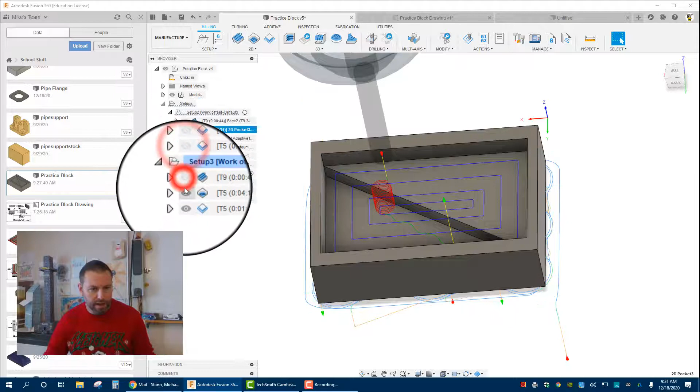All right, turn those off, and we'll open up a new tab, and I'm going to show you how to model the block, and then we'll come back to here to show you how to set up the actual operations. Now, all of the dimensions for this block are on the attached drawing file that I've created. I have one in front of me because I don't remember some of these. But essentially, it's the same size block that we used to create our letters that we manually wrote the G code for.

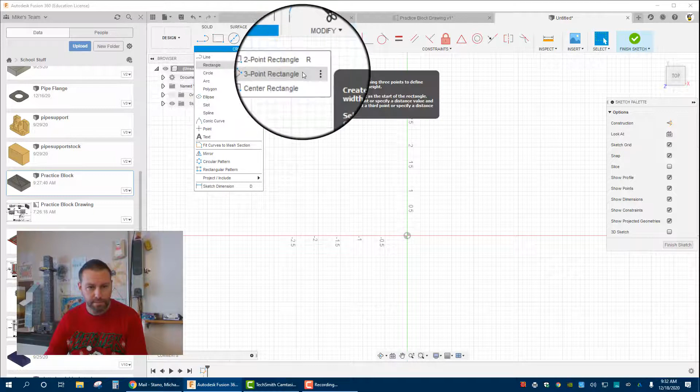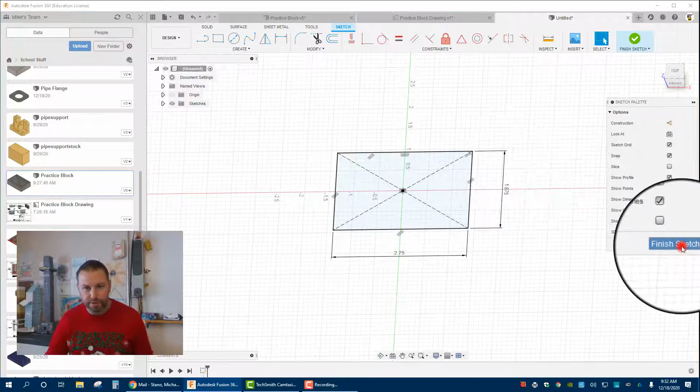All right, so I'm going to create a new sketch on this XY plane right here. I'm going to start with a 2-point center rectangle right here, and that is going to be 1.875 by 2.75. Now, these dimensions are slightly smaller than the 2x3 block that we're doing, because then it allowed the machine to cut and make this block the exact size it is. Then we are just going to extrude up 0.75 inches. That's our basic block right there.

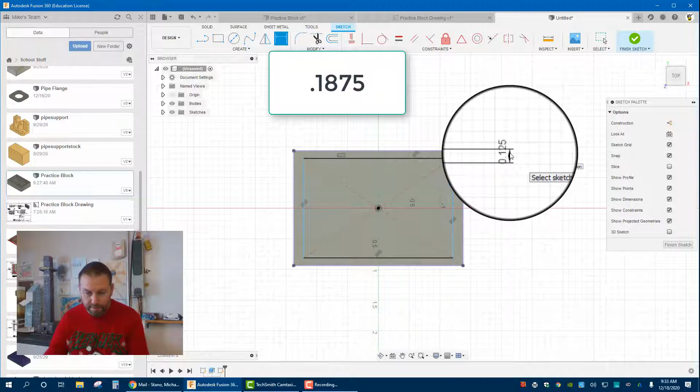Then I'm going to come in on the top here, create a sketch, and we can see that it's offset a little bit on the inside of 0.1875, 0.125. So I can come in with a rectangle here, draw it like that, then dimension. Hit project on that surface, so that's P, so now I can do these offsets. I know that's 0.125 there. Here is 0.1875, like that. And if you want to double check it all the way around, 0.125 is there. And that's good. 0.188 just rounded up from 0.1875.

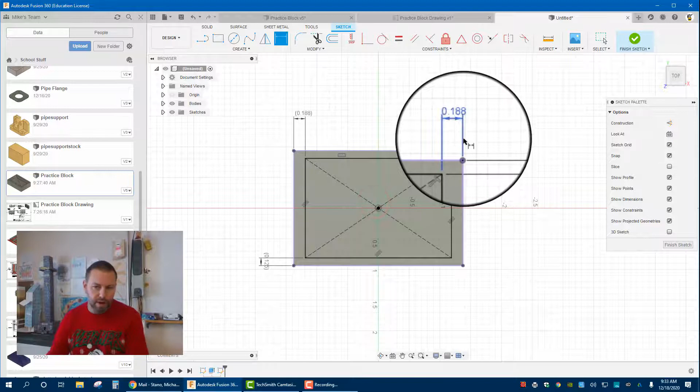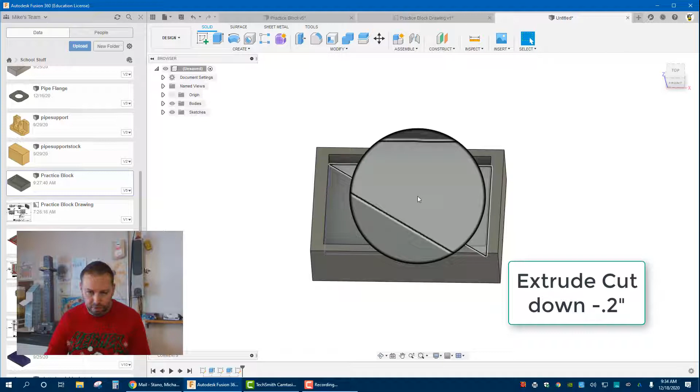We've finished the sketch, and we are going to extrude that surface down negative 0.25. So that's our first extrusion in. Then we're going to create a sketch on that surface. Actually, let's project that surface first. Hit OK. Line right from one corner to the next, like that. Finish sketch. So now we have two that we can extrude down, and it doesn't matter which one you do. I'm going to click on this surface and extrude down negative 0.2, make sure it's a cut. Good. So that side of the block is done.

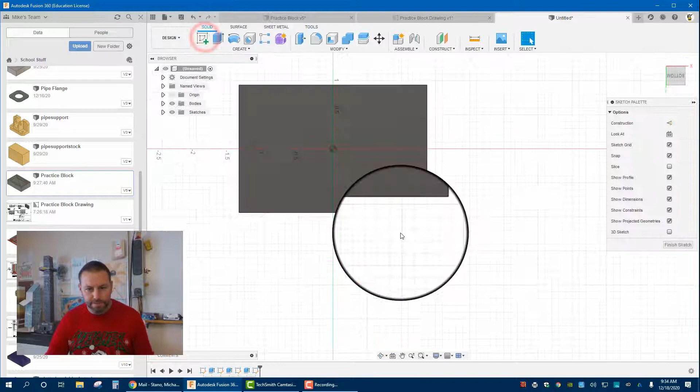Let's flip it over, and we'll extrude up those little nubbins, whatever you want to call them. Start sketch there. Those are 0.25. So I'm going to draw a circle of 0.25, and then dimension that. I have to hit project and project the geometry of that surface. And it is in from the surface 0.25 in both directions, like that. Now we finish sketch, and I will extrude up 0.1, I believe, looking at my drawing.

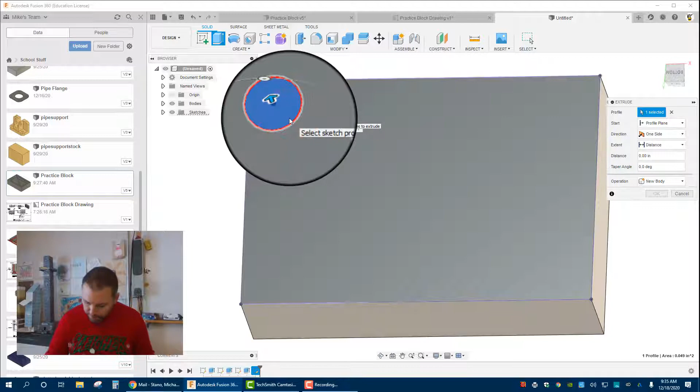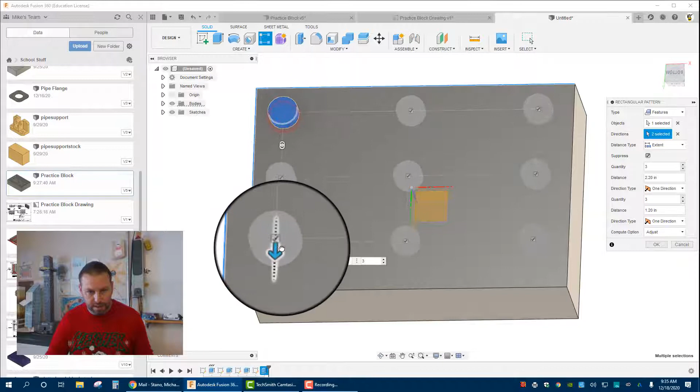And now I'm going to do a rectangular pattern of that. So I'm going to click features, directions. I want this direction and that direction, so two directions. And basically I can pull these like this and like that. Let's see if I can get the spacing correct. The spacing vertically should be 0.6875. That should be correct. And then the spacing going along this way should be 1.125. See how that looks. Oops.

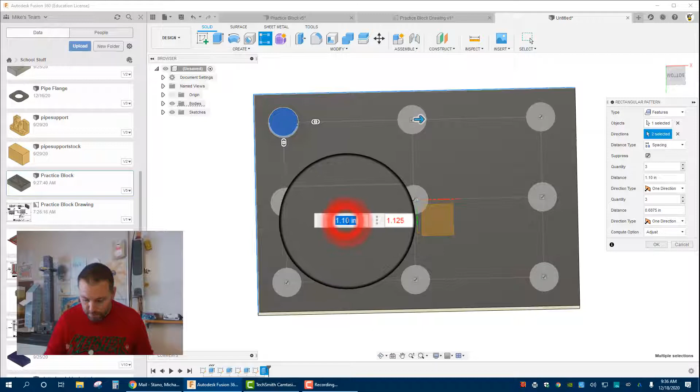Three like that. And let's hit OK. Let's see how that looks. Now we can actually, if we go into here, let's just double check. All right. And I'm going to hit project on a couple of these things. I'm just going to project them so I can get dimensions to make sure that the dimensions are correct.

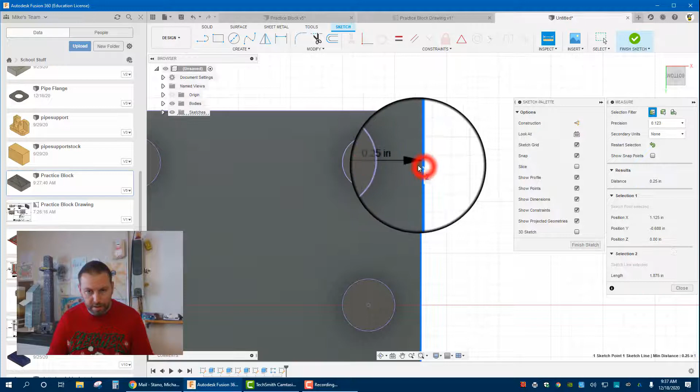So I can go up to inspect, click here. All right, so that is 0.25. And now from here, okay, inspect, from here to here is 0.25. So we're all good. Looks like that dimension is good. So then if we double check here, right, 0.25.

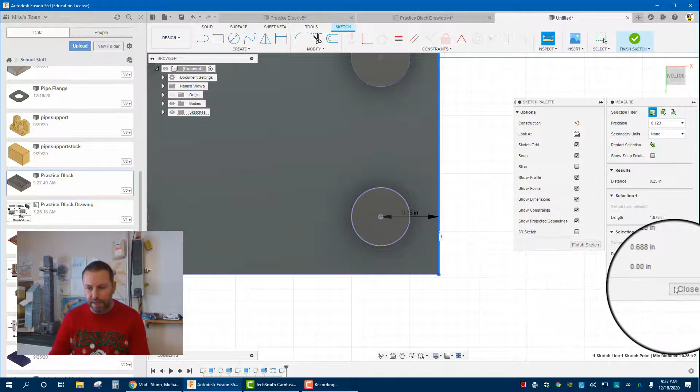Inspect again, and 0.25. Now if you follow the directions, you should be good to go. So it's a step that's not needed. It's just showing you how to use the inspect tool. And that now is the finished block. There we go. That's what we need.

All right, so now make sure you save this. Click save. And I'm just going to go flip over onto my practice block now. It's right here. So that is basically how you make the block. Okay. Now, if you have a little bit different method you want to make it, you're more than welcome to. But that is what you need.

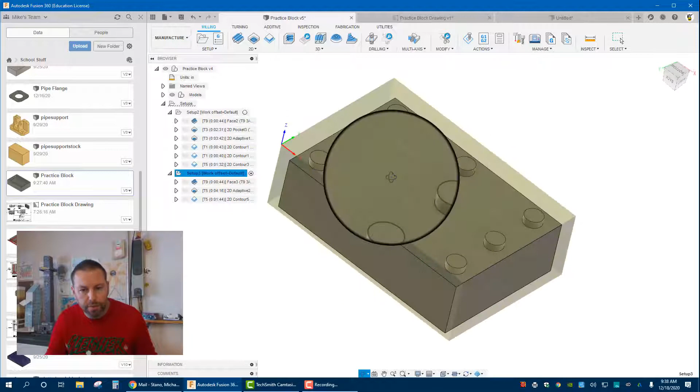Now we are going to go into the manufacture setup. So remember, last time we only did the 2D setup for the CNC plasma cutter. So now we're going to go manufacture. Okay. These are the tool paths. So I'm just going to go through the different tool paths quickly with you and then into the actual settings for them. So we're going to do a number of different tool paths.

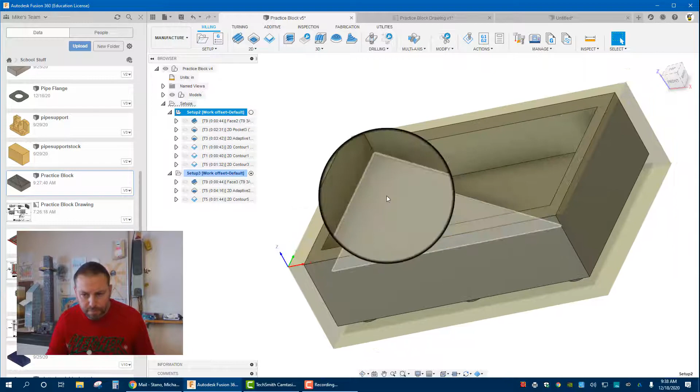The first one we're going to do, so we're going to machine this in two setups. Okay, so you see setup 2 and setup 3 there. So this setup, right, is the first one. And notice my work coordinate system is X, Y, Z, up like that. So we're doing this section first. Then we're going to come in, flip the block over to do these right here, and that's going to be my second setup. So two setups, multiple operations in each setup.

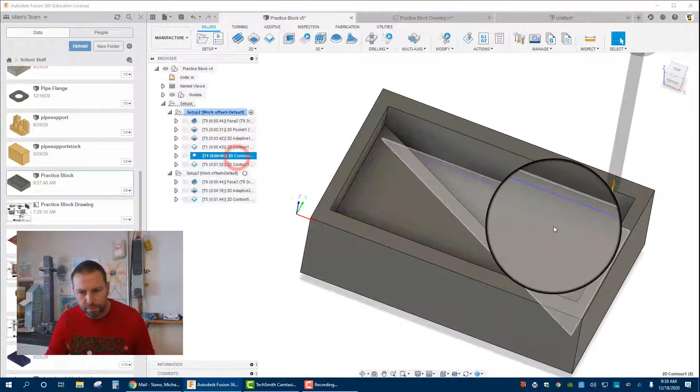So let's take a look at the first one here. So that's my first setup, like that. I'll show you how to do that in a moment. Then we are going to do a facing operation first to cut the material off the top, followed by just a 2D pocket. Then I will show you an adaptive pocket, a contour to clean up the edges and come in with a smaller tool, repeating that for the bottom. And then we are going to do a 2D contour around the top here to machine away and get us one of the final shapes.

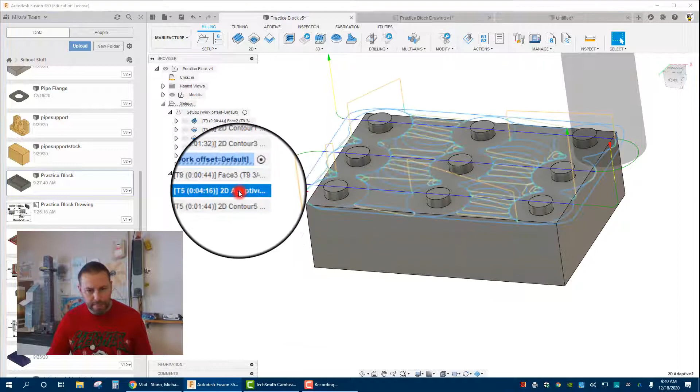We're then going to come around, flip the block over, face off material on the top again. So the facing gives us a very quick operation to clean and clear off a good amount of material. A 2D adaptive to clear away that, and then a 2D contour to come around and clean up around the edges of those little pegs, whatever you want to call them.

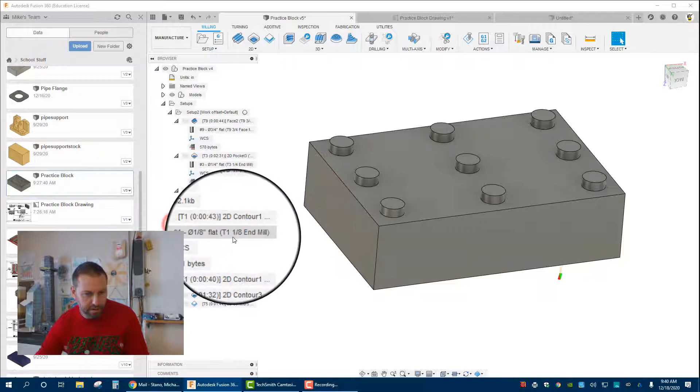Okay, so the first thing we are going to need to do is create a tool library with all the tools that we need to do this. So we have a number of different tools. The first one, so if I click the drop down here, we have a 3/4 inch flat end mill. That's what we're going to be using. A 1/4 inch flat end mill there, right, and an 1/8 inch. So I'm just going to write these down so I can show you how to do it.

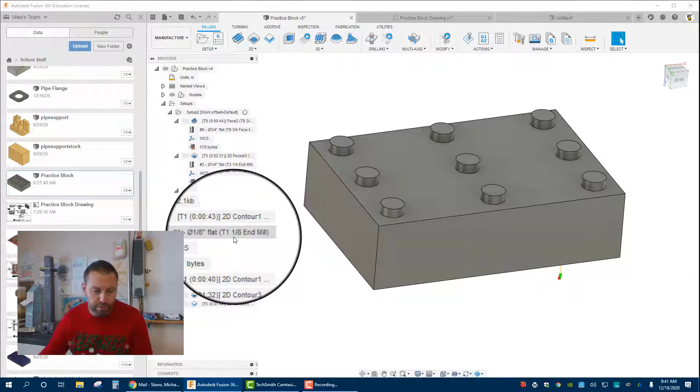So 3/4 inch face mill, 1/4 inch end mill, and a 1/8 inch end mill. Those are the ones we're going to be using there. And when we go to the other side, click there, same thing, right? 3/8 end mill, and also 3/8 there. So I'm going to add that to my list as well. 3/8 inch end mill. So those are 4 tools that we are going to need to create. So let's do that first. Let's create these.

All right, so these are just basically numbers off the top of my head. Nothing too crazy, but they're going to get us where we need to go. So we're going to go to Tool Library up on top. Go to Library over here, and you're going to hit the plus sign. The first one we're going to do is going to make the face mill. So we go over to face mill, right?

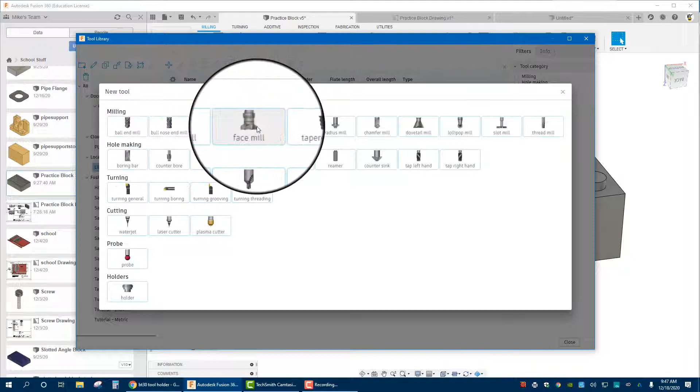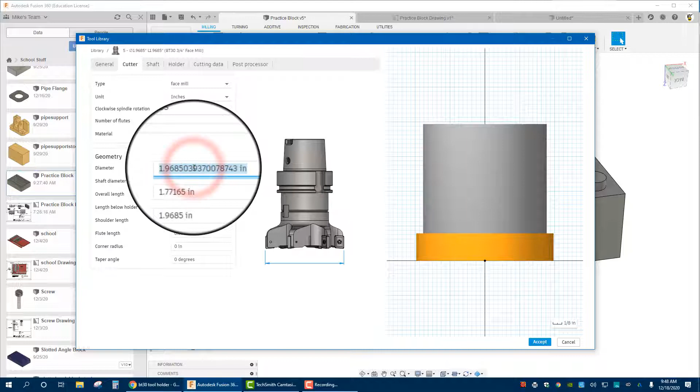And we can call it a BT30 3/4 inch face mill. Cutter, face mill, inches, good. Number of flutes, 3, high-speed steel. Now the diameter, like we said, is 0.75. So this is really small, but we're just using it for the simulation.

Shaft diameter, let's go 0.5. It's going to be slightly smaller. Overall length is 2 inches. And length below tool holder, let's do 1 inch. So you see how it's updating over there. We'll keep all of this stuff the same here.

Shaft, don't worry about holder. We're just going to use a regular BT30 up on top. So click on it, select holder, and there you have it. Cutting data, we're going to leave it at the 5,000 RPMs with all of their feed rates. Post processor, we don't have to worry about. Hit accept. So that's the first one.

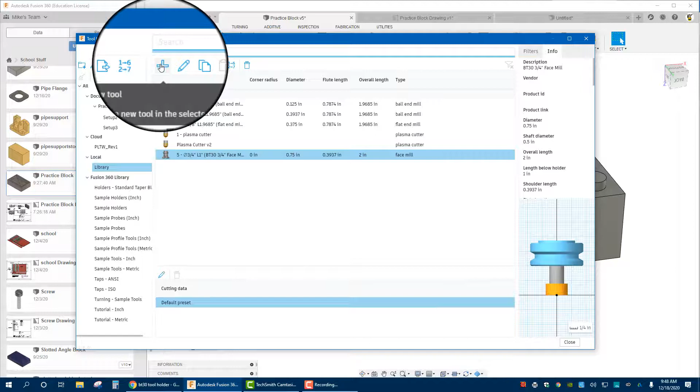We're going to go in again, new tool. Now we're going to use a flat end mill. This flat end mill is, let's do our 3/8 first, and we'll go decreasing size. 3/8 inch end mill. Cutter, flat end mill, inches, right? So the diameter is, let's do 3 divided by 8. All right, so 0.375. Overall length, let's keep it with the 2 inches again.

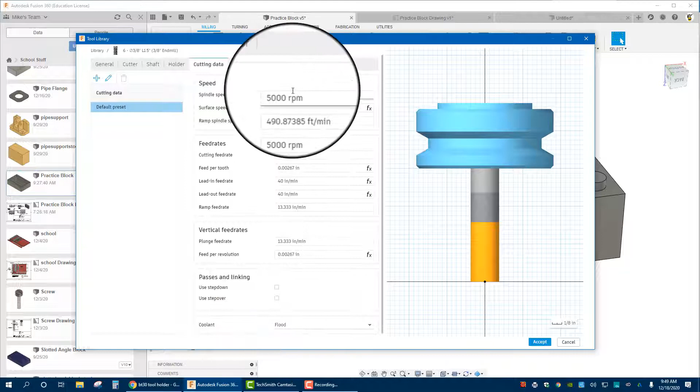Length below tool holder, we could do 1.5 inches, like that. Shoulder length, and we'll keep all of that the same. Shaft, click, holder, once again, a BT30. Select that. Cutting data, we're going to keep all of their parameters in. Post processor, good. Hit accept. Now we're basically going to repeat that a couple of times.

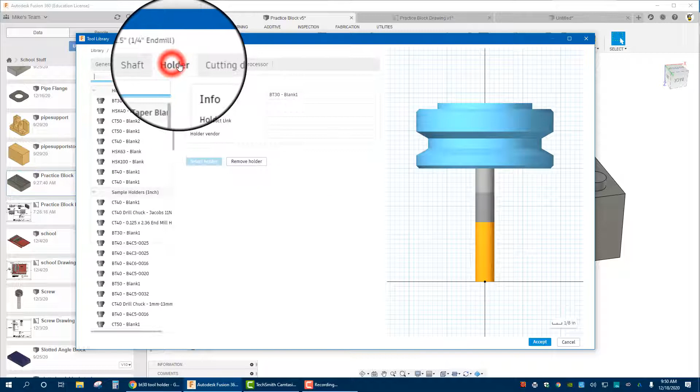So we can right-click on this, duplicate tool, go in, hit edit tool, and now we'll call this 1/4 inch. We're going to change the cutter to, we'll do number of flutes, we'll go 4 flutes. And diameter, that would be 0.25. And we'll keep everything else the same. Holder BT30 is all good. We'll accept all of their other parameters.

We can right-click, duplicate that tool. And now we can go into that new tool, edit it. That's, whoops, 1/8 inch end mill. Right, cutter, we'll keep 4 flutes, 0.125 for that. We'll keep everything else the same. Keep it all going through, accept.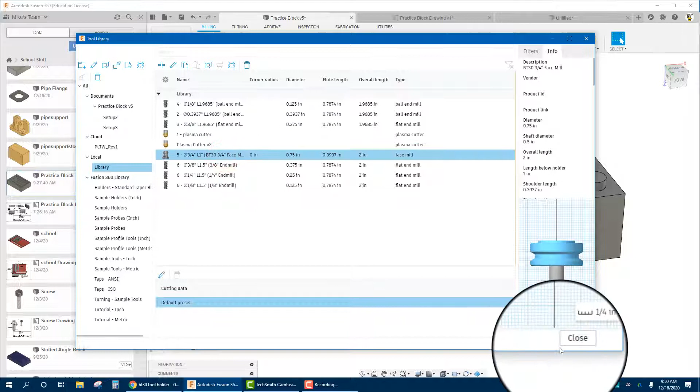And now we have our 3/4 inch face mill, 3/8 end mill, 1/4 inch, and 1/8 inch end mill. All right, so we can hit close, and if you want to click through and look at them, there we have it. Hit close, so everything should be good. All right, so at this point, we are set up and good to go to create all of our tool paths that we need for this. And the first thing we'll do is going to create this setup.

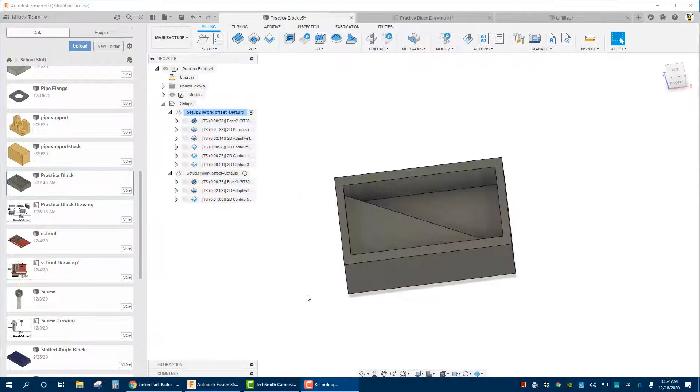Okay, so the first thing we're going to do is create our first setup to mill these pockets inside there. So you're going to click into setups here, click setup up on top, which will bring you to this menu. All right, so this brings up where we're going to put all of our points and our stock. So we're going to select the milling operation, and the work coordinate system, WCS, we want is box point. And you're going to click this lower left-hand corner right here so that the X is along this path, Y along that, and the Z is up.

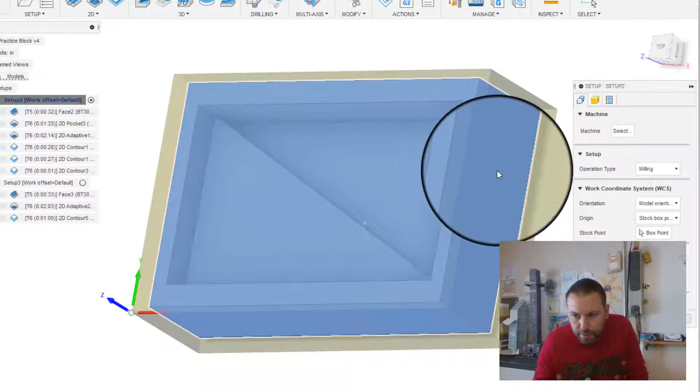Model, click and make sure that's highlighted blue. And then for the stock, it's 3, 2, and 1 for the X, Y, Z. So we can look all around. You can see that transparent color, set that up like that. It also tells us the dimensions of the block here. That is a fixed size block. Post-process, don't have to worry about it. Leave it as 1001 and hit OK.

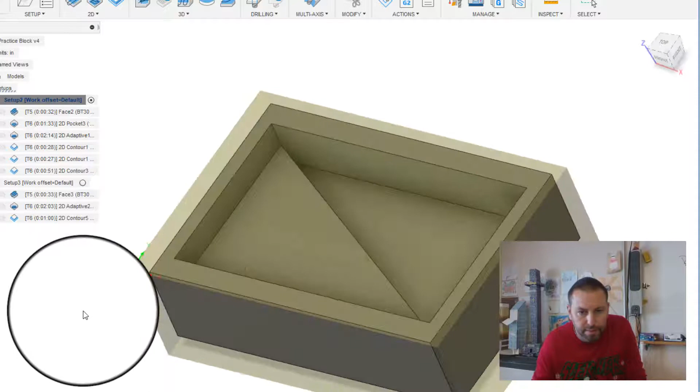So that sets up the first work coordinate system for the first series of operations. We'll do the next setup when we get to that point. Now what we're going to do first here is mill off the top of this. So let's take a look at the simulation here so we can see what it looks like first. So I'm going to click on it, go to simulate up on top.

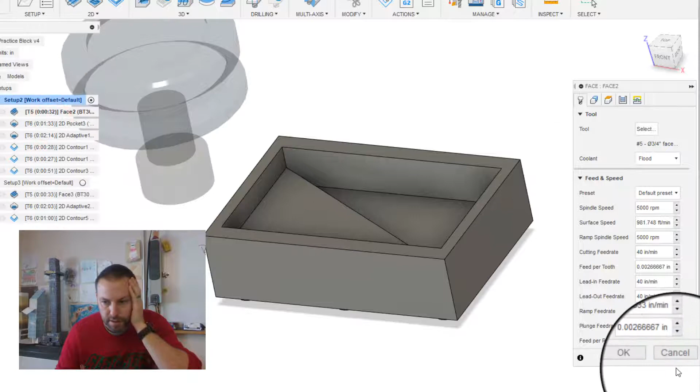You can see it sets up our tool, and we'll hit play. So it's going to take off just a small amount of material on the top of the actual block. In order to do that, let's close that. Okay. So in order to do that, you're going to click face up on top here. And notice in Fusion 360, when you hover over a certain thing, it tells you what the operation is. Click face, it's going to open it up to be like this.

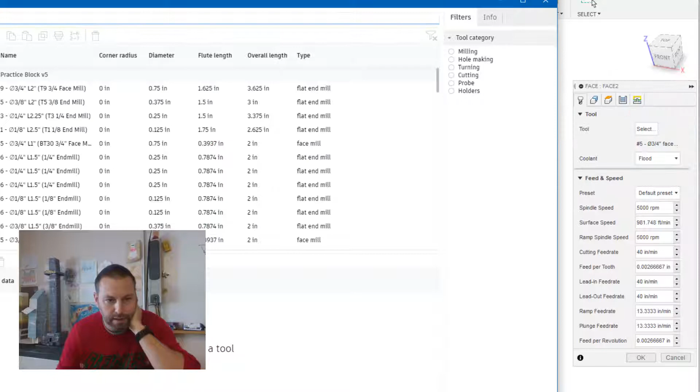So the first thing we want to do is select our tool. So you're going to go select, library, and you're going to look for the tools you made, and we want the face mill. Hit select. You can leave these presets. Remember, we can change them later. Right now, we just want to create the toolpaths. The geometry you're going to want to select is basically stock selection. You can leave it blank and have it just do this whole top. So this is the contour of the actual block.

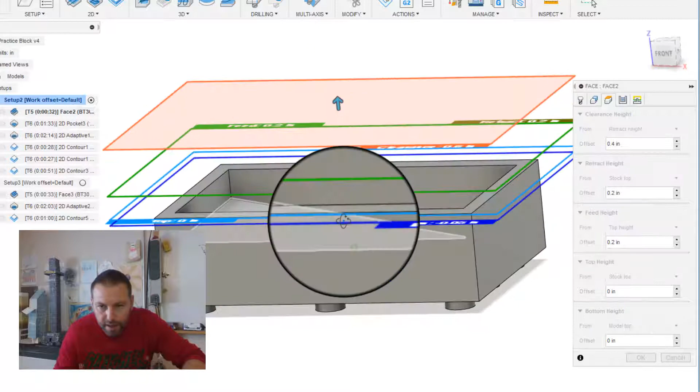These are the heights that we want to leave. So the bottom would be set to the model top. Right? Clearance height, basically how high the tool is going to retract up. Feed height, and then our bottom heights there. We're just going to keep this at a 0.004 tolerance. This is the step over, which is basically how much of the bit is going to be utilized in cutting. So that's 0.7125, and it's going to mill in both directions, which you can see here.

We're going to do a high feed rate mode. We're going to preserve that. Maximum stay down distance. All of these are going to stay the same, and we hit OK. And you should generate this path. Sometimes it takes a moment, so if you hover over it, it'll give you the percentage of how long it took to create that face mill path. And let's hit simulate again. And that's what you should have. It should look relatively close to this.

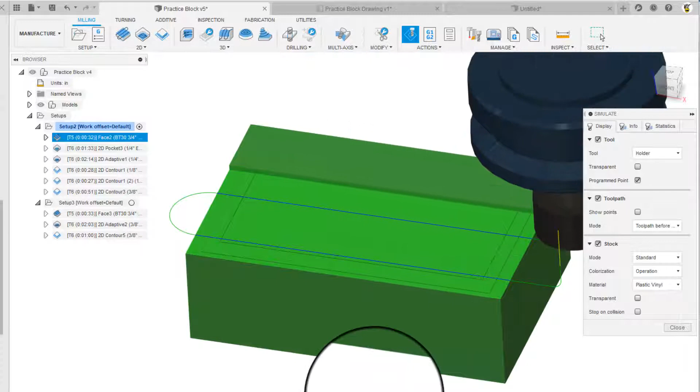And you can adjust the settings in here to keep stock or not, make it transparent, and change the amount. I keep the toolpaths in. You don't need to show points or anything like that. Info is over here, and statistics.

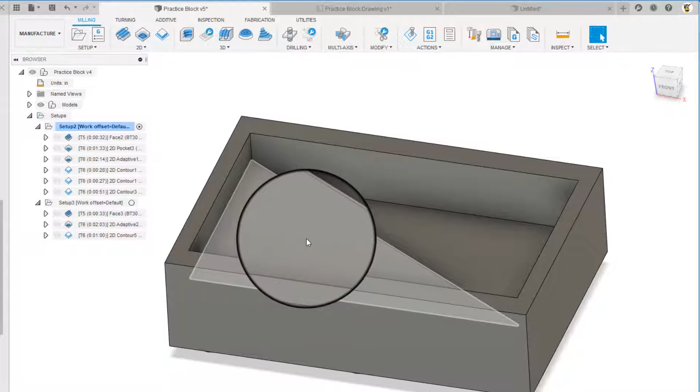The next operation we're going to do is create a 2D pocket that will remove this rectangular amount of material. So we're going to go up on the top and hit 2D pocket. So click that. I'm going to bring it into mine. And what we're creating is a toolpath that looks like this. It's going to mill down. Show the simulation of that. Okay, let's do this. Simulate those two. Okay, I'm skipping ahead. And now here's the next one.

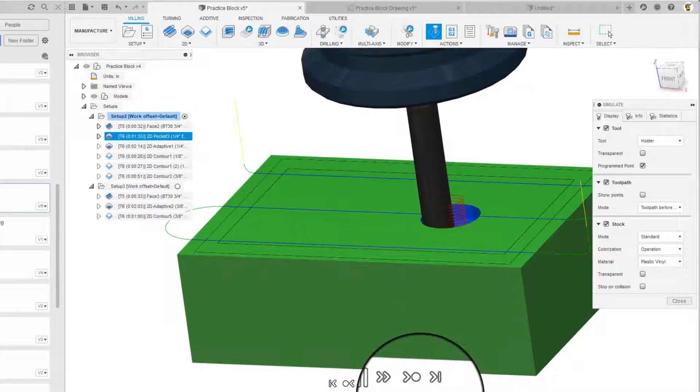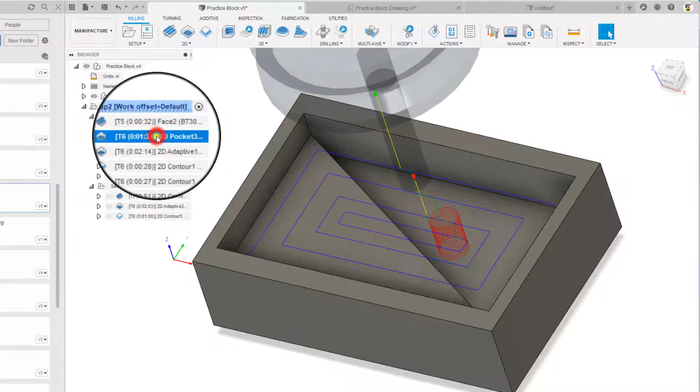So it does a helix down into the material, and then cuts out along this path here. We are going to leave a small amount of material around the outside edge to come in to do finishing passes, as we can see here. Okay, so 2D pocket. Let's click off. Edit there. For this, we are going to use a 1/4 inch flat end mill. Let's go to select, library, 1/4 inch flat end mill.

Leave the stock defaults. For the geometry, you're going to want to select the pocket that you want done. So you're going to click this and click this inside edge right there. Leave all of that unchecked. We'll leave all of this the same except for the bottom here. Go to selection, click on bottom reference, and then you're going to want to click this triangle surface right here. This we are going to leave the same. Finishing passes, unchecked. Max step over, keep that the same.

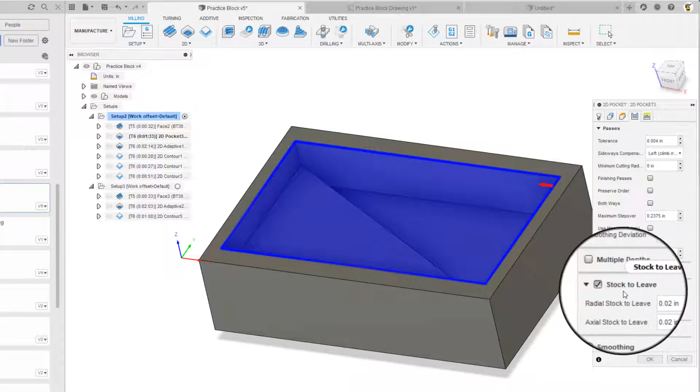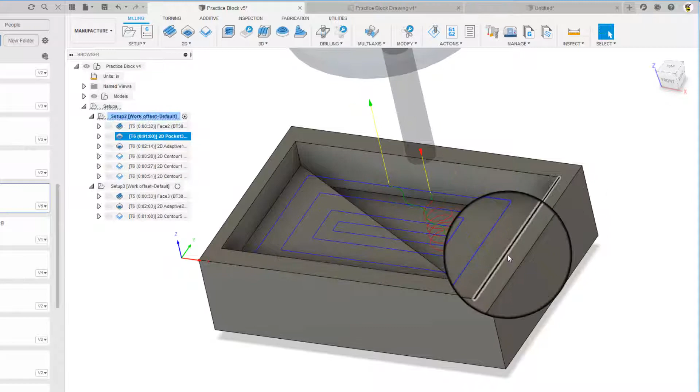With that, we are going to leave a small amount of stock to go around the outside, 0.02, so we can come in with a finishing pass. This is all kept like this. We don't need to change any lead-ins. We can actually change the helix ramp angle. Let's go like 5 or 6 degrees. It makes it a little bit more aggressive. Hit OK. Should take a second to generate. And there's our helix, and you can see that we made it just a little bit more aggressive to go down. All right. So that was a 2D pocket.

For here, to get down the rest of this material, we're going to use an adaptive strategy. An adaptive strategy basically allows you to clear more material efficiently while keeping the same load on the actual tool. So let's take a look at the simulation of that.

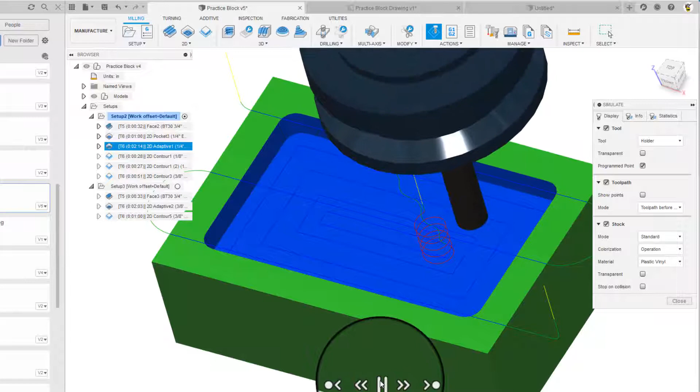Simulate all 3 up to this point. Skip ahead. And now, let's do a helix down. Let's move the speed up. And you can see it clears out in that spiral pattern.

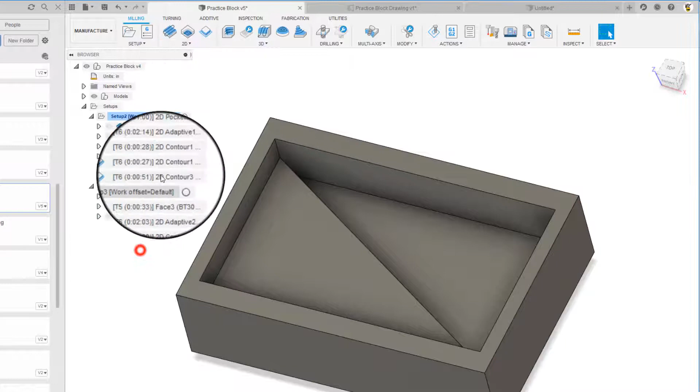Do it now with the 1/4 inch end mill as well. So click up here, 2D adaptive clearing. Edit. We're going to use that 1/4 inch flat end mill with the stock presets. The geometry here, pocket selections, click that. And you're going to want to click here, or right down here, that pocket selection. All unchecked for those.

The bottom is to select the contour that we did there. Keeping this all the same, keeping some stock to leave, 0.02. And we are going to keep these all the same. We can actually up this to 6 degrees for the helix angle. Hit OK. And now that's your 2D adaptive.

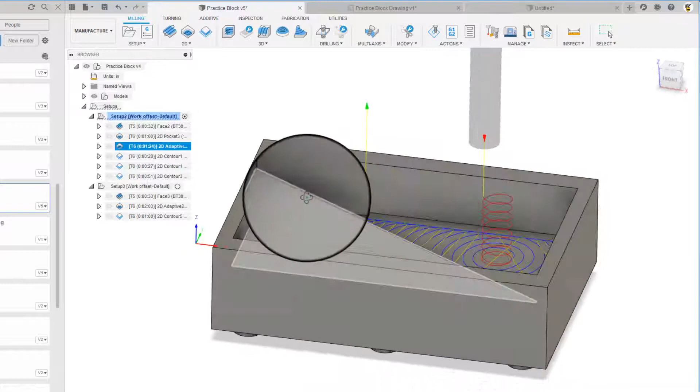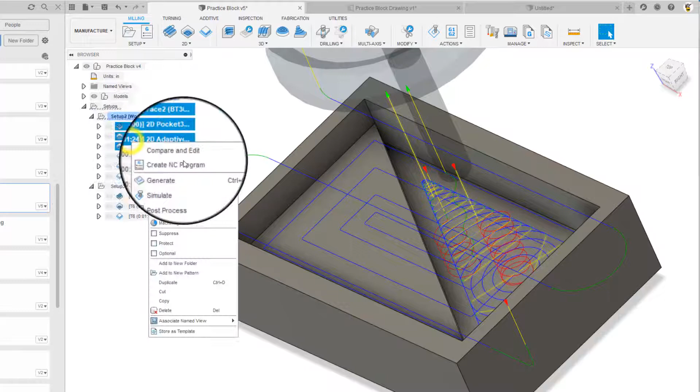So now we've milled out this area, and we're going to go through some finishing passes to clean all this up. We're going to do a 2D contour here, and that's with an 1/8 inch. So now let's take a look at these as they simulate. Okay, facing operation, our first 2D pocket, and that.

Now notice inside on here, we have some rounded edges where the tool couldn't go all the way in, and we have some stock left over. We're going to take care of that now with the 2D contour. So click here, we go right to 2D contour on top, bring it down to this one right here. We're going to go edit.

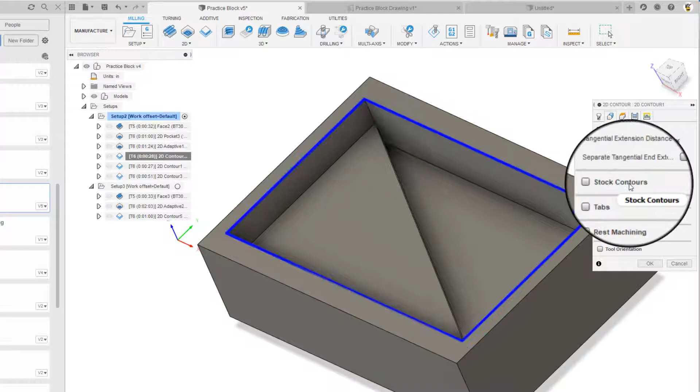We're going to use an 1/8 inch end mill, so we can go select the tool, library, 1/8 inch end mill. That'll get tighter into the corner. And we are going to select this geometry right here. Stock contours, leave that, all unchecked. To the bottom, we're going to do selection, do this face right here. Otherwise, everything else stays the same.

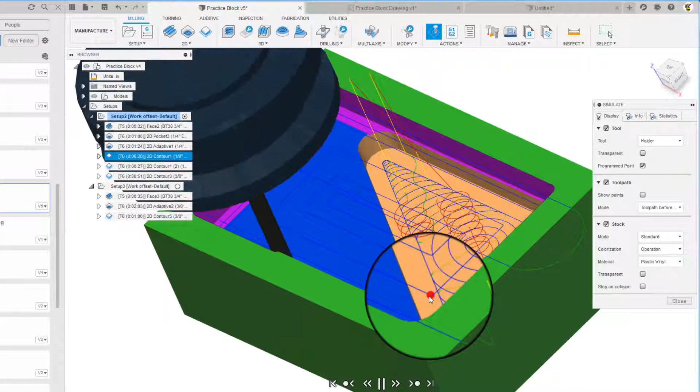All this, stock to leave, put in a 0 or uncheck it. Checking it and putting in 0 is the way to be. All of this stays the same. Hit OK. And let's simulate that. And play from here. You can see how it goes in. Comes around the outside and cleans it up. Gets a little bit tighter into those inside corners. There. Easy enough. We're going to repeat that process for this one down here.

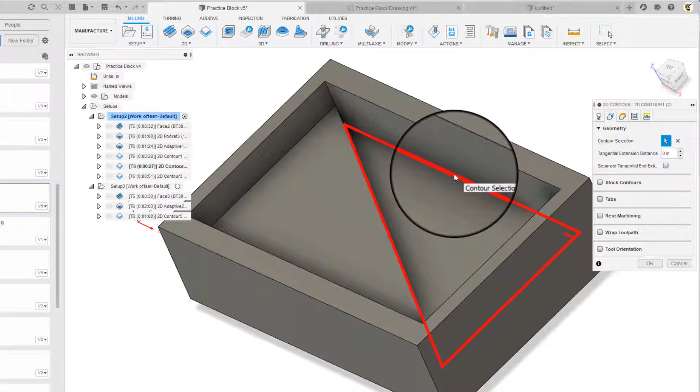So just about the same exact setup. You could probably duplicate this setup or just create a new 2D contour up on top. Hit it. Same tool. Select that bottom contour selection. Bottom face for the height. Stock to leave, set to 0. And everything else remains the same. Hit OK. And let's simulate that.

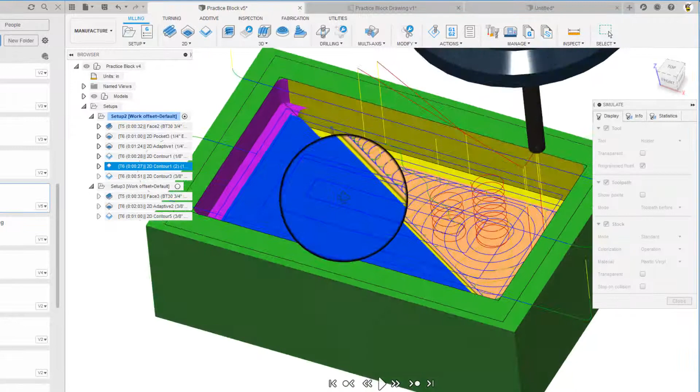Skip ahead to the operations. And there's that bottom one right there. Yeah, just cleaning up a little bit more around those outside edges to give us the exact tolerances we need. Now finally what we're going to do is mill around the outside edge. Milling around the outside edge will give us the exact rectangular shape we want for this. It's another 2D contour.

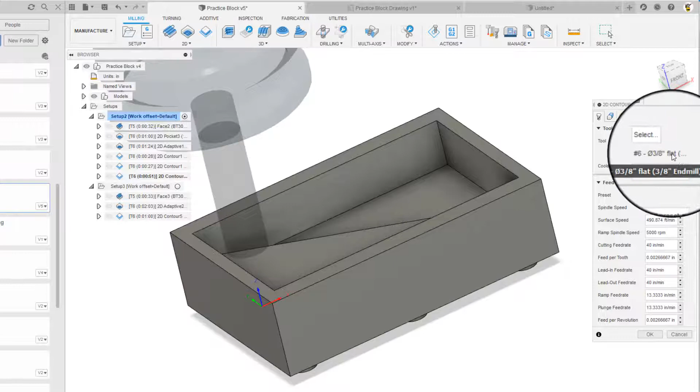So click up into here, 2D contour. And we're going to use the 3/8 flat end mill. Contour selection. You can select this bottom edge right there, all the way around, leaving all unchecked. Well, this is good. Select the contour, was that bottom one.

Roughing passes. I did this time so that it does a finishing pass as well. So the maximum step over is for the size of the bit, or for the end mill. Smoothing deviation, 0.004 inches. This is all left as it was, and hit OK. So for this one, we can simulate it just like this.

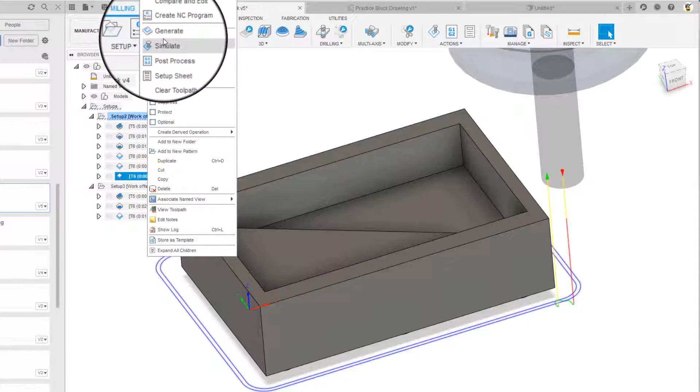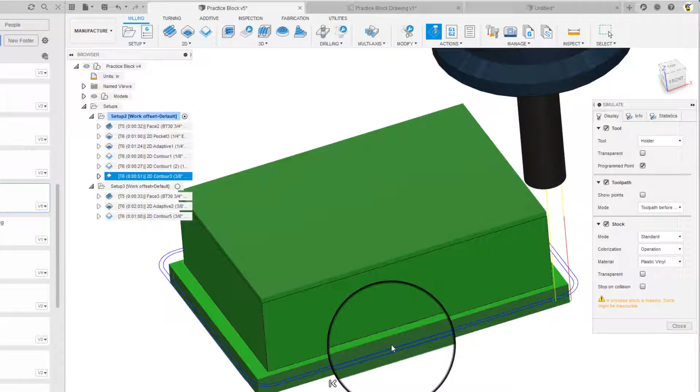Right, notice it leaves the rounded corners on the first pass and then comes around and does a nice tight corner on the outside. This is where it's going to be held into the actual fixture or the vise. So we cannot mill all the way down. We're going to mill that on the second setup. We'll be able to take all that off.

All right, so I would save it at this point. So we've done everything here possible for that. Now we're going to create a new setup on the opposite side here. So you're going to click Setup, and it'll bring you to this. All right, so we're going to have to flip the block over. You can hold Shift and the scroll wheel to go through those.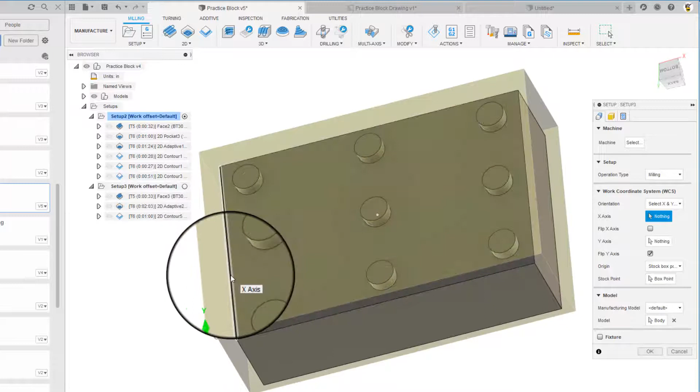Operation type mill. You may have to do Select XY axis. Click that, click, and then you're going to select this edge for your X, this edge for your Y, and then flip the Y axis to get that, and it should come like that. You may have to move or click your box point around to that corner there. Click on body, make sure it's selected.

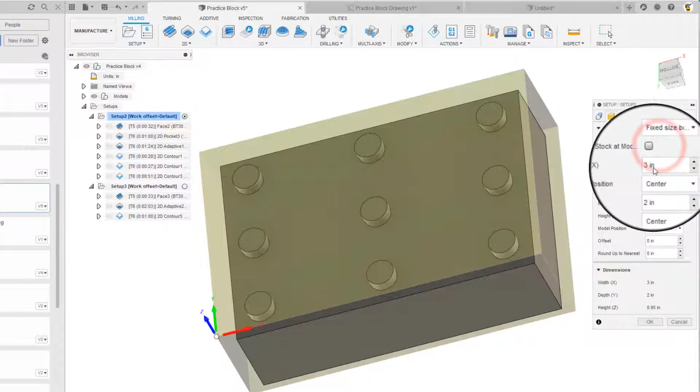Same thing, we're fixed size box, X and Y, 3 inches, 2 inches, and the height for this is 0.95 inches because we took a little bit off from the top last time. Offset from the bottom, 0 inches. All right, because remember we did mill off initially in the beginning. Hit OK.

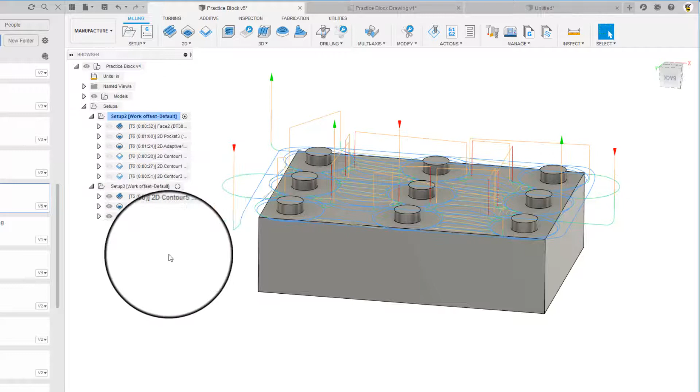So here on now this side, we are going to do 3 operations. We are going to face off the top to get to the top of the pegs, do an adaptive clearing to get all the way around them, and then a 2D contour to clean up those outside edges around those pegs. So here we go. So for the first operation, we are going to do a face and click face.

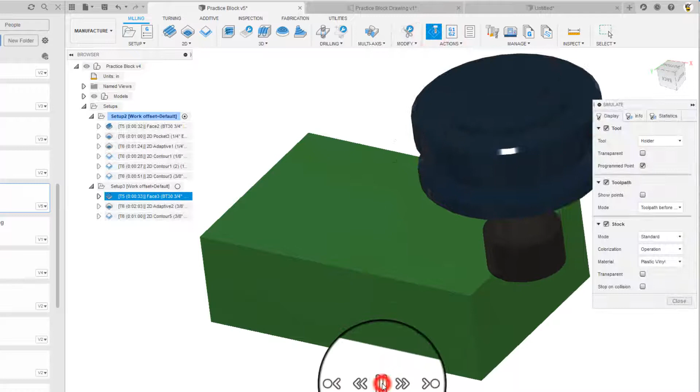Edit. All right, so we're going to go to the 3/4 inch face mill. So let's select that tool. Here, we do not actually have to select anything. It will know that it's got to go down. Stock selections, model top. It knows what it's going to face to. If it doesn't, you use selection, model top. Leave all this as is. And the same thing here, leave it all as is. That's what you get. Let's simulate that. Just like before. There you go.

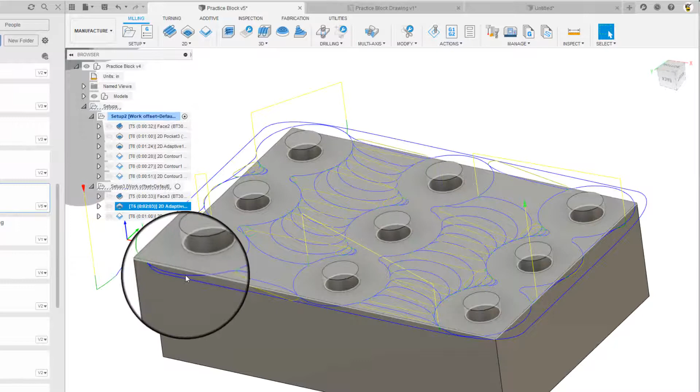Now let's do a 2D adaptive for this. So the 2D adaptive will clear out all around these pegs. I'm going to leave a little bit of material around them to come in with the final smoothing or finishing pass. So we're going to click 2D adaptive clearing, edit. Okay, we want the 3/8 flat end mill. Right here, library, 3/8.

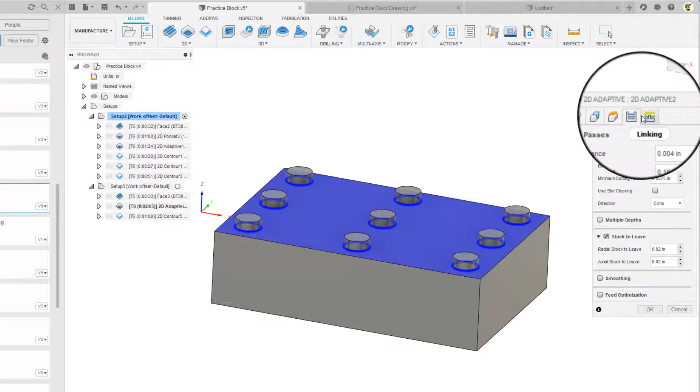So for here, you can click this surface. So pocket selection, click the surface. Click on stock contours, because that is from the actual material. Select the contours, it was already at the bottom. Leaving this all the same, stock to leave, we're going to leave it as 0.02. Make sure it's checked. And keep all of this the same.

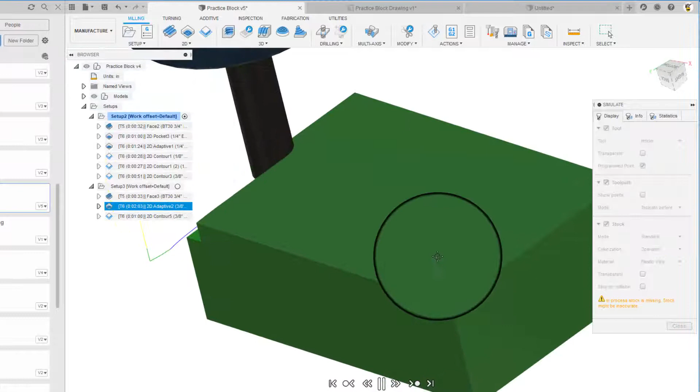We can actually helix a little bit more, 6 degrees. A second. And there we go. Let's simulate that. And there we have it. So now the green is still a little left. So let's go clean up some of that with a 2D contour.

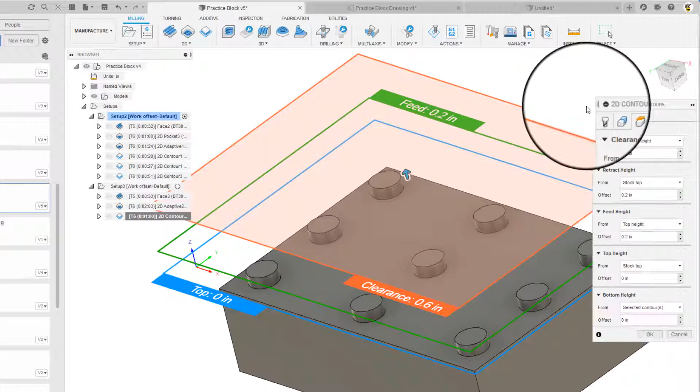2D contour, click on top, edit, same thing, 3/8 flat end mill, keep all those. Geometry, I come in and select the bottom edge of every single one of those. This lets the machine know it has to go around all of them. Stock contours, keep that checked. All these are all good. If it does not have the selected contours at the bottom, it should.

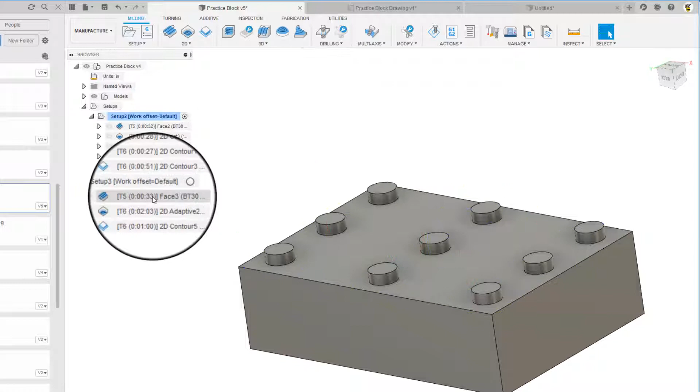Keep all of this as is. We're not doing any roughing passes. We're not doing this in multiple depths. Keep this the way it needs to be. And there you have it. So if we look at this, let's simulate it. So it's our facing, our 2D adaptive. I'll play it from there. You can see now how it goes around every single one. Cleaning up.

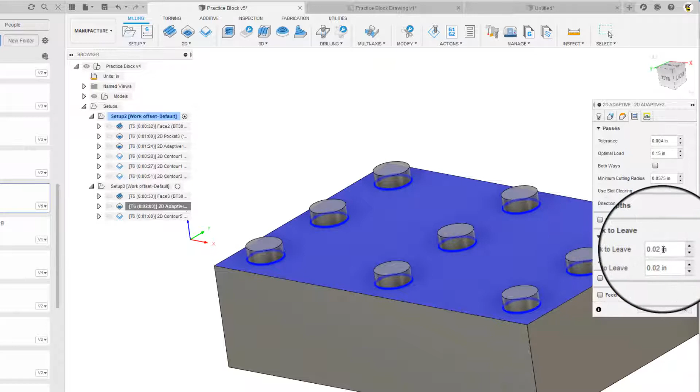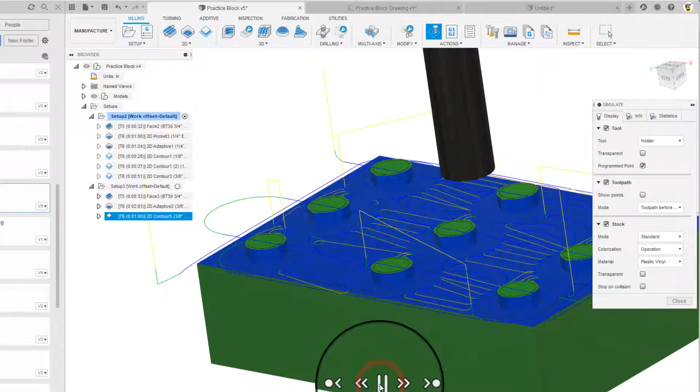So if you notice, we have this little bit of a bump. So we're actually going to change this to get rid of all of that. We go into the adaptive. We go edit, stock to leave. Let's try 0. Simulate. There we go. It's perfect.

So now, as you can see, changing that axial stock to leave, the 2D adaptive cleared off everything. So let's just go there again, just take a look. Click on it, right click, edit. Axial stock to leave, it's basically that height up and down, was set to 0. And there you have it. That is the part fully machined all the way through, using some face milling, some 2D pockets, adaptive contours along the way.